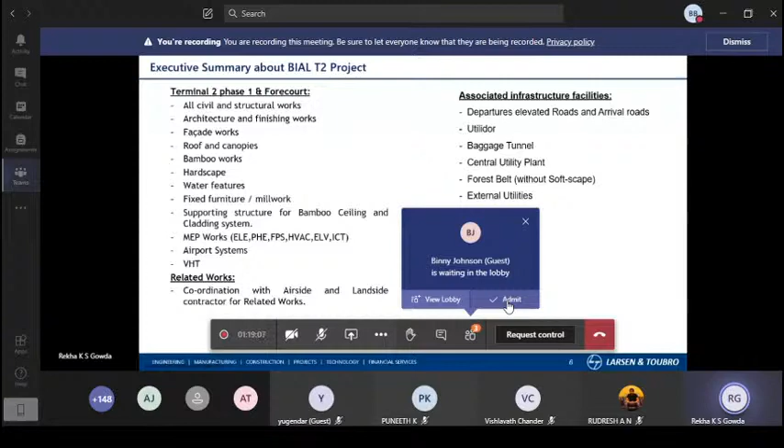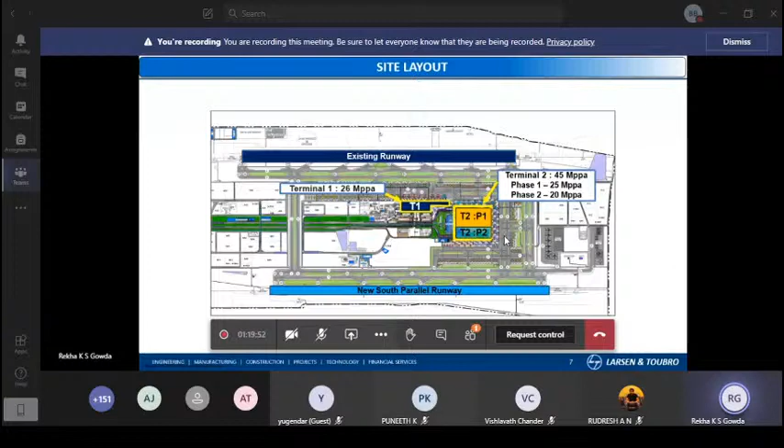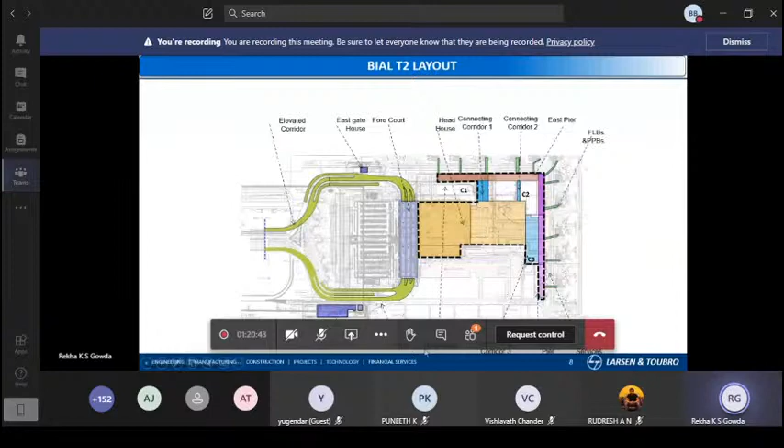And, as I said, there are some other infrastructures like ancillary buildings like the CUP building, Utilidor, and then in between forest belts are there, and then connecting corridors. This is the brief executive summary about BIAL T2. And then coming to the life cycle of the project.

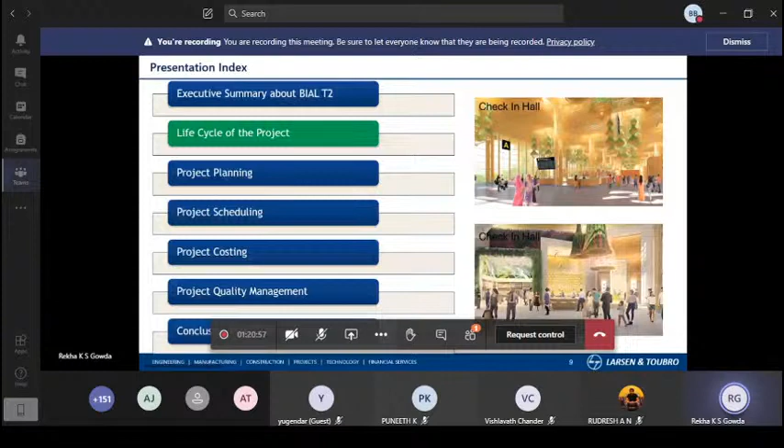The life cycle of the project: generally a project has a start and end date, and there is a sequence of phases involved from the start to the end handing over of the project. The number and sequence of cycles are determined by the management and various other factors like needs of the organization involved in the project, the nature of the project, and its area of application.

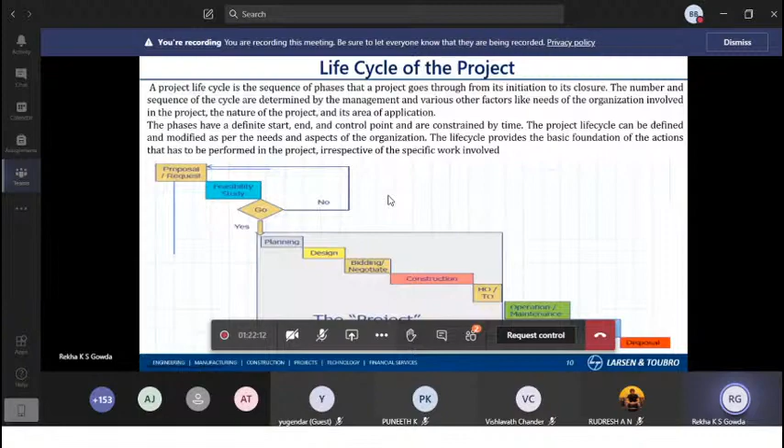Even before starting the project, we will be having some strategic planning, and even after starting the project, we will have execution planning. So here, planning is like the backbone of any project, and of course, execution also has a major place. But to execute the work, we need strategic planning. That is the reason planning plays a major role in any project.

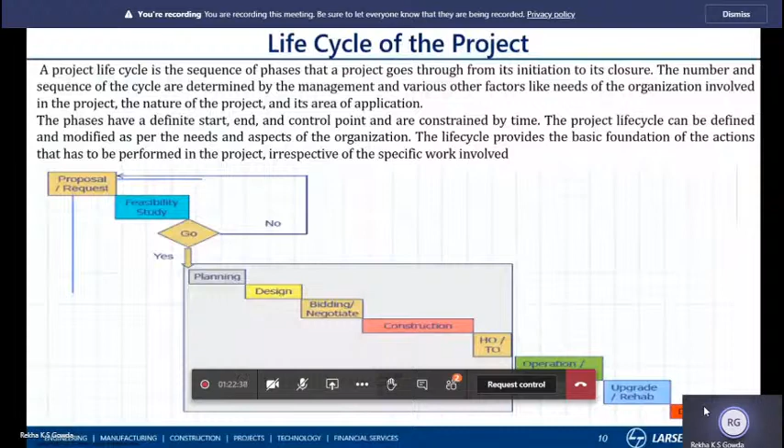And of course, in our engineering, we may study more about technical things like survey, estimation, transportation. But when we come to the construction industry, and to planning, it mainly focuses on management fundamentals. As I said, it mainly focuses on planning, scheduling, costing.

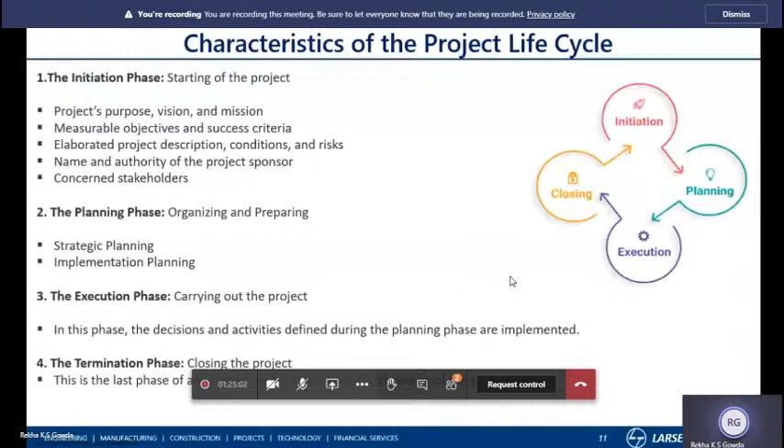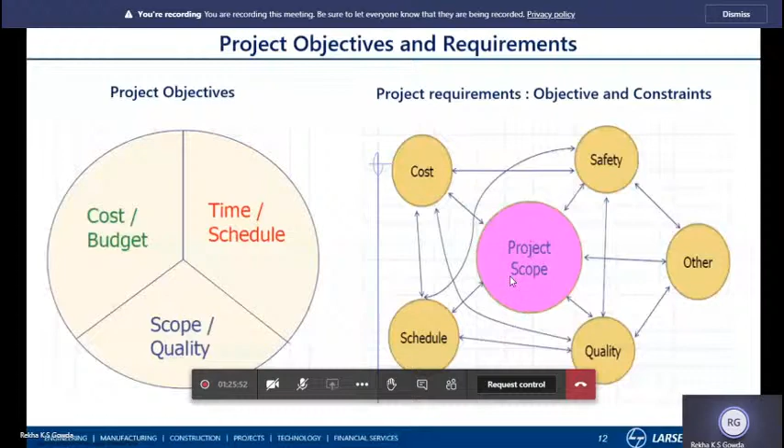And coming to the project planning. Project planning as defined is the determination of the project objectives, as I explained in the previous one, with identification of activities to be performed, methods and resources to be used for accomplishing the task, assignment of responsibility, accountability, and establishment of integrated plan to achieve completion as required.

So planning's role here is to achieve the project objectives, like to complete the project within the time, within the scope, and within the budget. These are the first primary objectives of planning, and these things can be achieved by identifying the activities which are to be performed for the project, what are all the methods which are going to be implemented, and what kind of resources are going to be used for this project. So these are the things which are mainly linked to the planning, strategic planning things, and the action which we take to perform these things, which mainly depends on your scope of the project.

And then importance of planning. Importance of planning means measure twice and cut once. There may be R&D. We will try option one, option two, option three, which is feasible. That will be identified and finalized. That is one thing, we measure twice and cut once, which is the best in terms of cost, time, and quality. That will be picked and executed. And planning and execution, there is an inverse relationship between planning and execution.

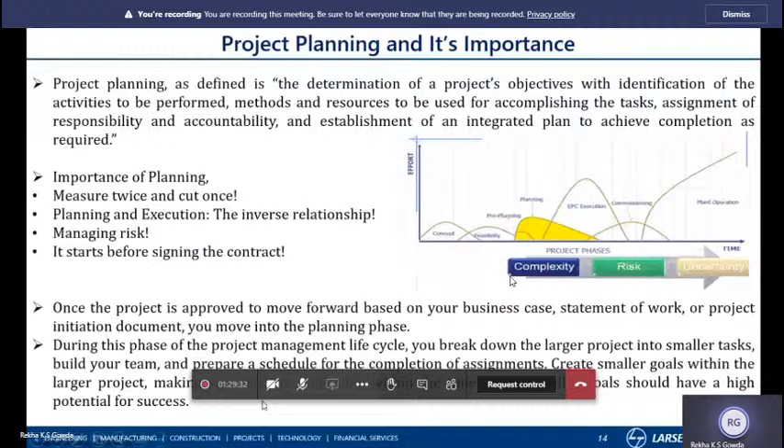Sure, and next coming to creating a project plan. Identify the project timeline, including the phases of the project, the tasks to be performed, and possible constraints. This is nothing but the scheduling portion. When we start the project, first we will identify the duration of the project. As I said, this BIAL T2 is a 30-month project.

So for a 30-month project, we will break down those 30 months, like how many months we need to complete civil, then MEP, then finishes, then airport systems. That breakdown we will do first, and then tasks to be performed. So which task is to be performed when needs to be identified, and possible constraints.

A possible constraint, for example, is any approval. All these constraints we will identify before the start of the project. These are all part and parcel of the project plan. And then coming to the workflow diagram: creating a workflow diagram, visualize the process using a work breakdown structure to make sure team members clearly understand their role in a project.

And then estimating budget and creating a financial plan. This estimating budget and financial plan is one of the important ones in any project, because as a contractor we majorly work on the cost, and it determines our total gross margin on any project. So estimating the budget plays a very important role in any project.

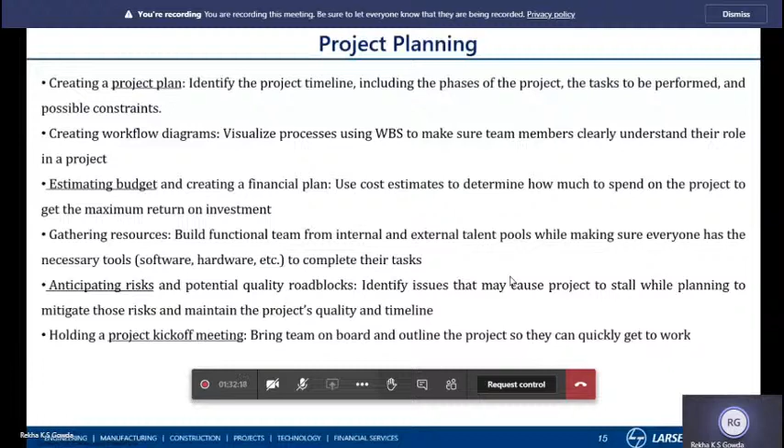And the planning phase consists of this work breakdown structure. Work breakdown structure: work is a physical or mental effort to achieve an objective or result or deliverables; breakdown is to divide into deliverable components; and structure is something arranged in a definite pattern of organization.

So WBS is defined as a deliverable-oriented hierarchical decomposition of work to be executed by the project team to accomplish the project objectives and create required deliverables. It organizes and defines the total scope of the project. As you see in this work breakdown structure, the project goal comes under level 1, and then the objectives of the milestone.

Here a milestone is nothing but a subgroup of the project goals. For example, completing the civil structure works may be one milestone, and completing the MEP service works is another milestone. These put together help to achieve our project goals, and these milestones will again be subdivided into deliverables. These deliverables will have each task and resource, and then will be divided into work packages.

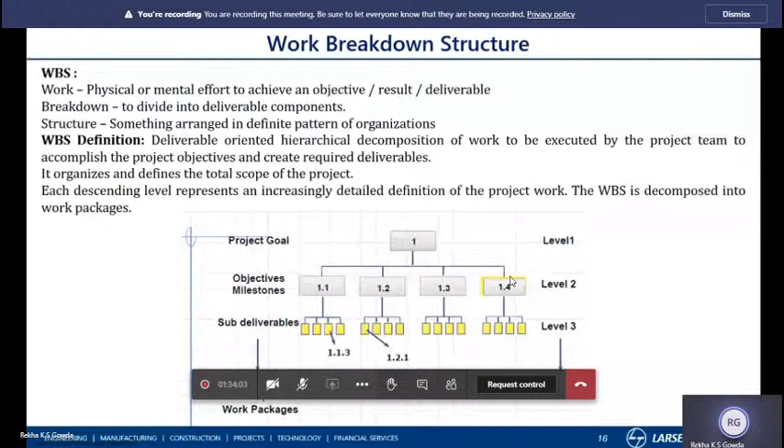And these are all hierarchical breakdowns. The first level defines the project, the second level defines major and supporting deliverables, and level 3 defines the lowest management responsibility level. Here our management responsibility lies with level 1 and level 2. Level 3 is completely under execution.

And then a work breakdown structure subdeliverable includes the outcome of more than one work package from perhaps 2 or 3 departments. Therefore, subdeliverables do not have a duration of their own. Subdeliverables do not consume resources or cost money directly. The intersection of work packages and organizational units creates a project control point, and this cost account integrates work and responsibilities. And this is how the WBS works in any project.

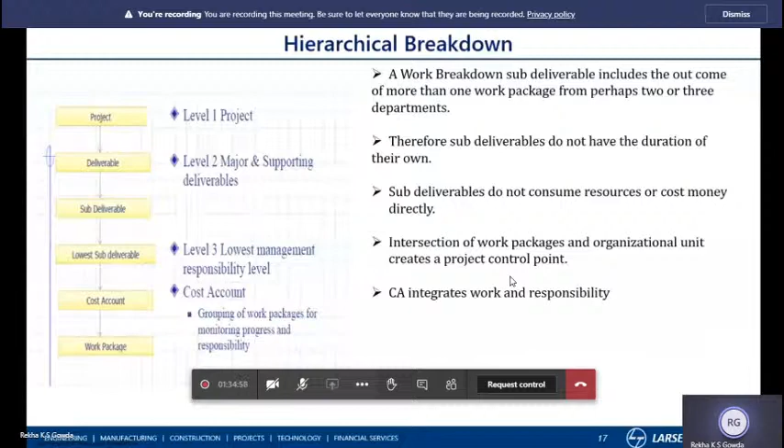Generally, MSP, Microsoft Project, will be used for scheduling. Since some projects have specific conditions, we have to use Primavera. Okay? So in the airport project we are using Primavera 6 for scheduling, and WBS will be defined in this way. First is acceptance criteria, then scope baseline, then work breakdown dictionary, then project scope,

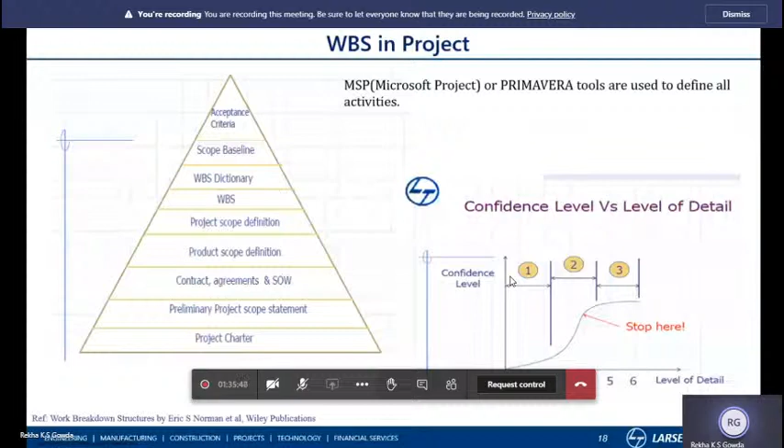then contract agreement, then preliminary project scope statement, and then project charter. The project charter defines all the activities which need to be executed. So those are the things which come under project planning. And then coming to project scheduling.

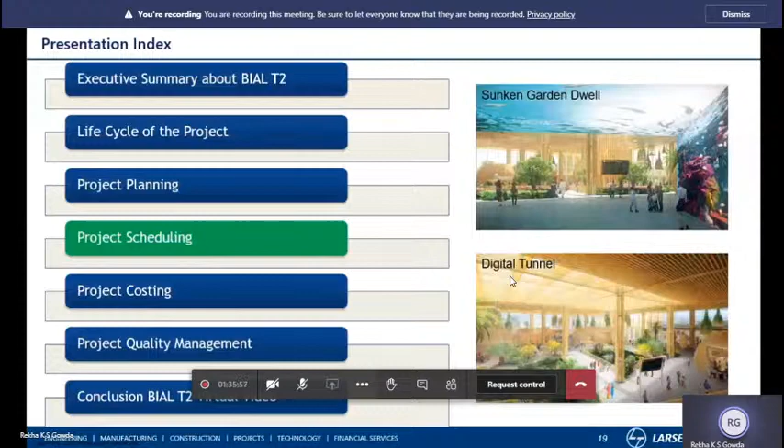I guess you guys might have gone through all these things. In general project scheduling, we use Primavera, and the Gantt chart will generally be used in MSP as well as in Primavera 6.

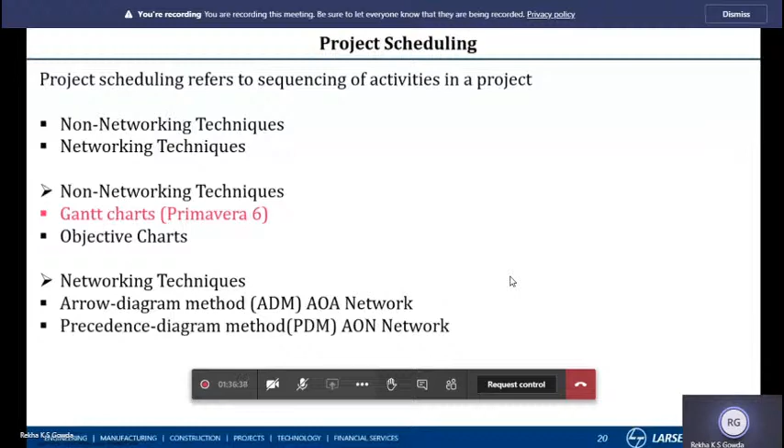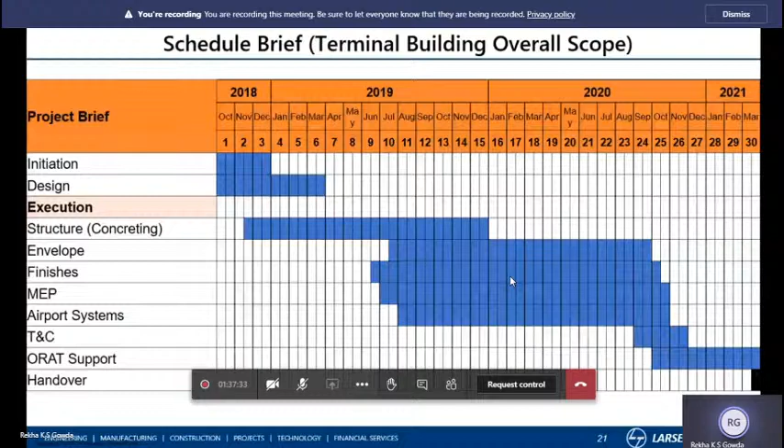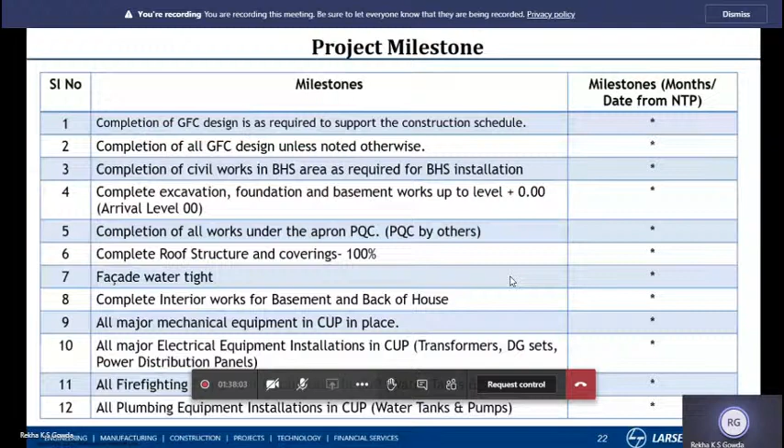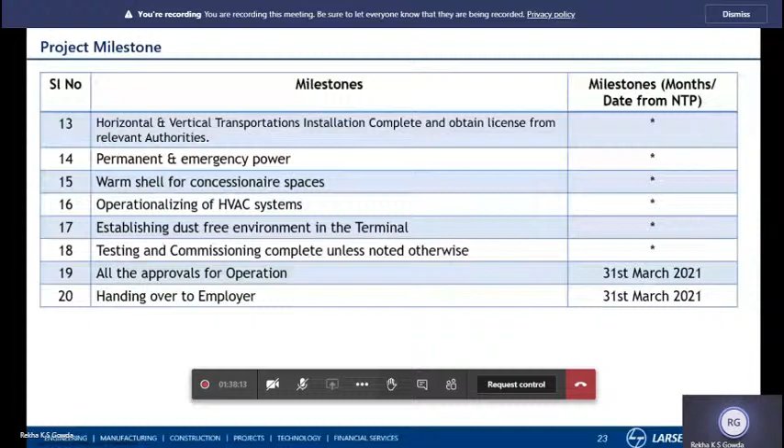And then coming to the project costing. Project costing is nothing but the total expenses of the project which we are going to incur. And before going to this project costing, I just want to brief about this cost. First thing, cost refers the amount of expenses spent to generate product or any services like construction. Cost refers expenditure that may be actual or nominal expense incurred to generate output. Cost is the value of economic resource used as result of producing or doing things.

Cost has many meanings, but in management, cost refers the expenditure, not the price. Expenditure means that includes the price of the goods, whatever. The cost which we are going to incur to get the final product is called as the expenditure. As a project professional, we use cost information for taking decisions or making plans, programs, policies and strategies. Then coming to the cost engineering. Cost engineering

Is it audible to everyone? Am I audible to everyone? Yeah, yes, ma'am, you are audible. You can continue. Okay. Yes, ma'am. Okay.

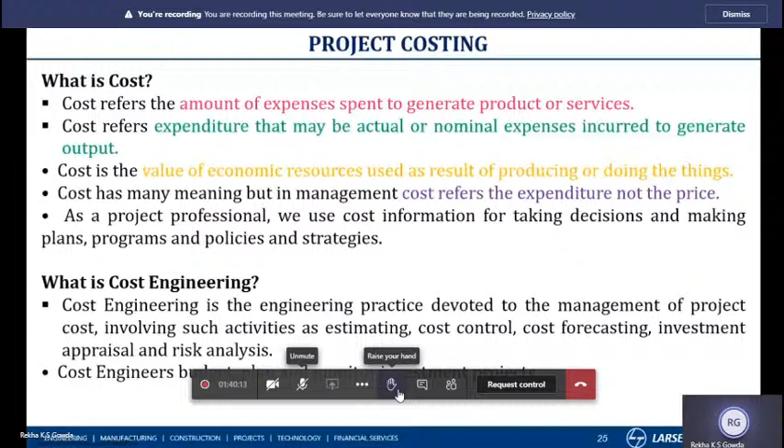And when it comes to the costing, there are three elements in the costing: material, labor, and expenses. Material cost includes direct as well as indirect. Material is not only the physical part of an asset, but also includes failure costs like scraps, construction formworks, safety items, and logistic costs to transport the material to the workplace. So in this material, there are two divisions: direct material cost and indirect cost.

Direct material cost means directly which is going inside the construction activities. That is called the direct material cost. And indirect means it is just like a supporting activity. That may be transportation. Example, to get that material, we need transport. For shifting of this material, we need the transportation. So that is the indirect expenditure which we are going to incur.

And then coming to labor cost. Cost incurred for the entire project team from laborer to foreman to project engineer to project management. Here also, labors generally means those who are going to do the work at the construction site. They will come under the direct labor cost. And indirect means, for example, foreman, project engineers, project manager; they are all supporting, like a service kind of thing. Those costs will come as an indirect labor cost.

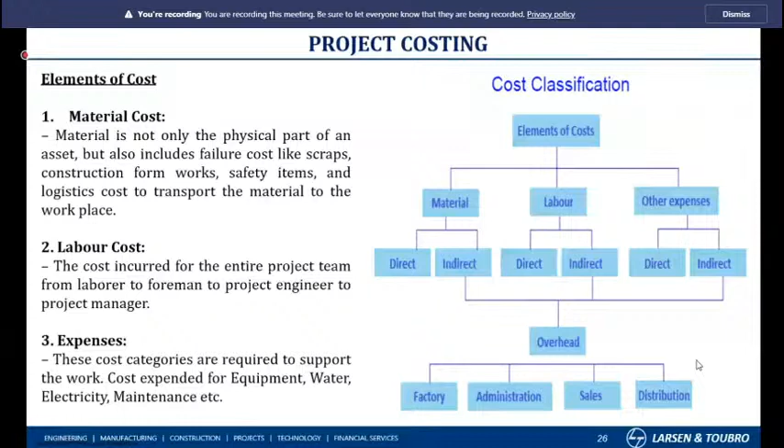And then coming to the cost structuring. Cost structuring will help to get a clear picture of how the cost is expended on the project, like to understand whether it is direct cost or indirect cost. This cost structure says that, suppose material portion, if concrete we are using. Concrete material, yes, that is a direct cost material, but whether 100% of it is used as a direct cost, or there are some portions like shifting, lifting, all those things which come as an indirect cost. So this identification will be defined by the cost structuring.

So cost structuring helps in assorting cost elements into direct cost, indirect cost, fixed cost, and variable cost. Cost structuring has a total of four types: direct, indirect, fixed cost and variable costs. This will help management to do effective estimation, budgeting, and cost controls. Coming to the direct cost, it is the cost of the resource which is used exclusively for the purpose of completing the activities or assets for any given project, and it cannot be shared among other projects.

Hence, direct cost is any cost specifically identified with a particular final cost objective, but not necessarily limited to items that are incorporated in the end product as material, equipment, or labor. For example, for BIAL T2 construction project, foundation of PTB, which is nothing but passenger terminal building, includes trenching. Trenching is nothing but MEP services which are used in the basement while doing this footing. So this includes formwork, solid blocks and concrete, and the laborer to place and finish the concrete work.

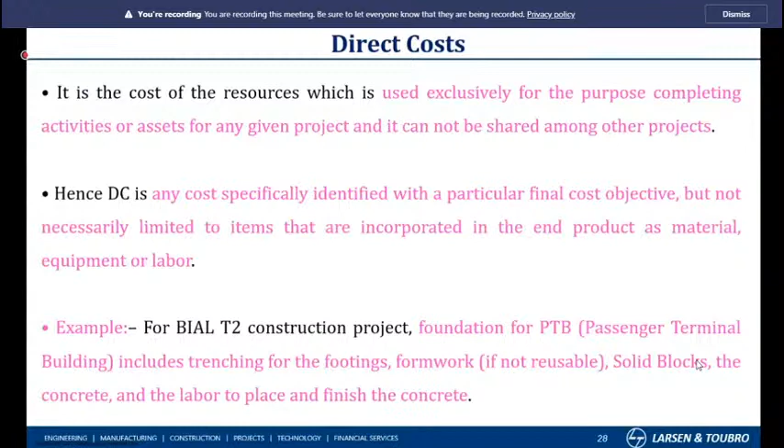And coming to the indirect cost, it is the cost of resources which is used to support completion of activities or assets for any given project, and also associated with other activities and assets. This indirect cost allocated to an activity or asset is based upon the direct cost elements such as labor hours, materials, equipment costs, all three. It is also referred to as overhead cost or burden cost.

Indirect cost is nothing but the service cost. Say, for example, in any project you take staff, department staff and welfare cost, PF and temporary structure cost. These are all service costs which indirectly help to achieve the construction activities. It's called indirect cost.

And then coming to the fixed cost, it is also called period cost or capacity cost. Fixed costs are those cost elements that must be provided independent of the volume of work activity or asset production that they support. It doesn't change in the short term period or within a relevant range. For example, project setup cost, infrastructure creation cost, fixed salary, office rent. These are all the fixed costs.

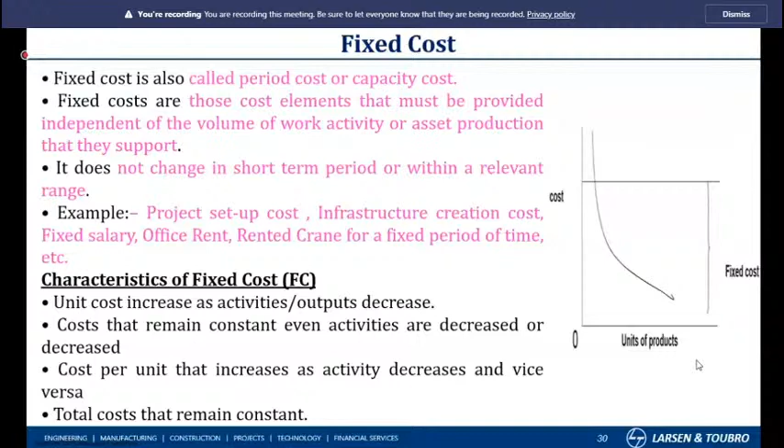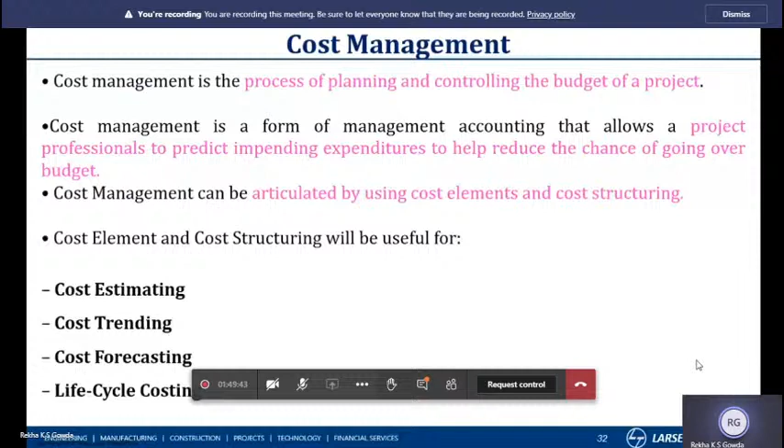Then coming to the cost estimation, this tool is used to predict the quantity, cost and price of the resources required by the scope of a project. I guess in engineering we all might have studied this cost estimation: estimation in terms of quantity, and then in terms of cost, in terms of price. Cost estimation is needed to provide decision makers with the means to make investment decisions, choose between alternatives, and to set up the budget during the front end of the project.

And then prerequisites for proper cost estimation are scope clarity, cost element structure, and historical database. This historical database means the previous experience. Suppose in the previous project, the same experience which we may use while analyzing this project. So previous historical data plays an important role while doing this cost estimation.

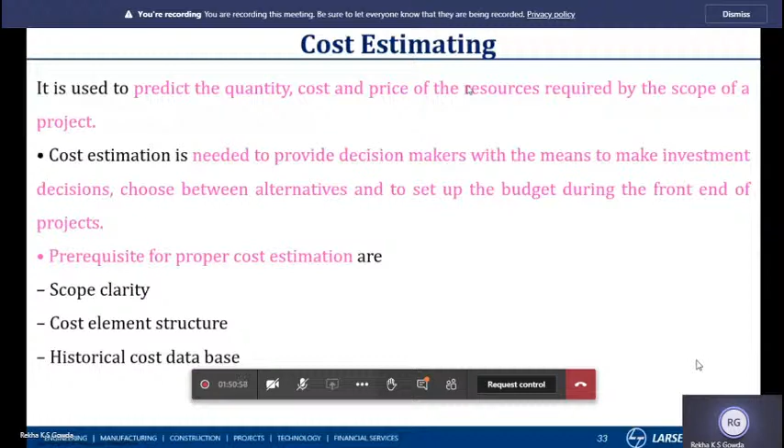And then cost trending. Cost trending is useful where the historical data is used as a basis to estimate the resource cost, used to predict future spending trends or to complete the project activities. It refers to historical information to find information like, just as an example, how much did we spend for welding of pipes for the past 6 months and how many inch diameter of pipe being welded. This is just like previous historical data and how much we are going to incur that cost. This is nothing but cost trending.

And what is our monthly site expenses cost for the last 1 year? So this will help us to estimate the future expenditure of the project.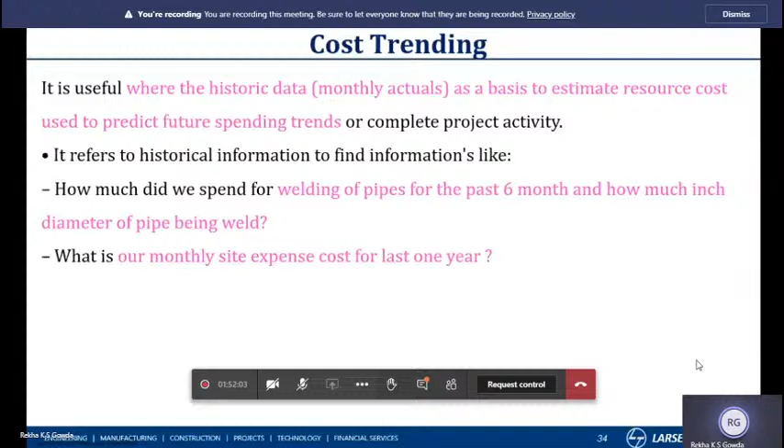And then coming to the cost forecasting, it is nothing but determining required expenditures at the various payment stages of a project. Estimation emphasizes estimating future project activities and assets, but in forecasting, the future cost expenditure will be predicted based on the historical cost performance. So this forecasting phase will come once the project starts, in the middle of the project.

Suppose the project is completed at 50% and the balance 50% is there. That balance 50% we will estimate and forecast, whether this 50% will be completed within our budget or whether we are going to incur more than that. This estimate to complete will be forecasted, as I said, based on the previous historical data.

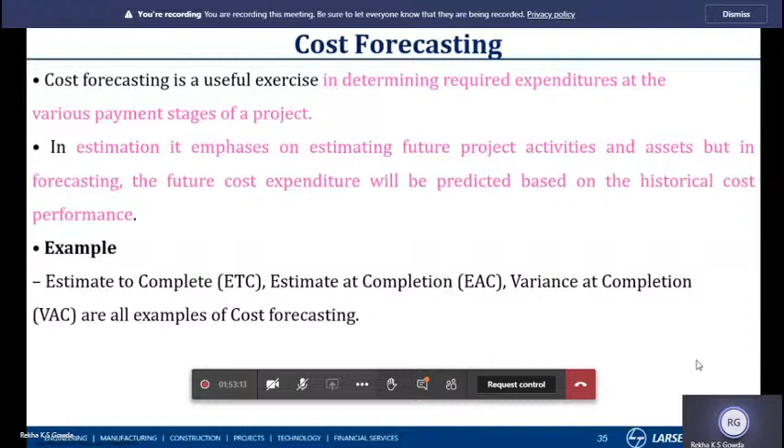And then coming to life cycle costing. Life cycle costing means the cost of creation of project assets and maintaining assets throughout their life cycle, including the disposal cost. Generally, this phase of costing will not come in a short duration project. This is anyway at the end of the project only. Life cycle costing enables decisions on acquisition, maintenance and refurbishment or disposal to be made in the light of full cost implication. So this life cycle costing will include design, construction, operation and maintenance, and disposal.

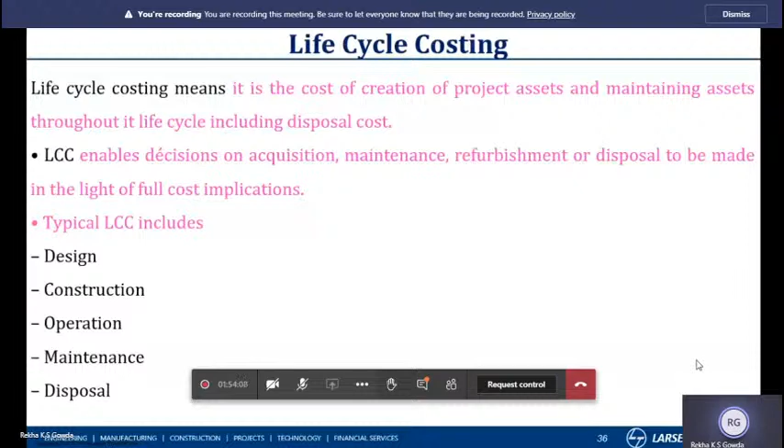And coming to the project quality management system, it is applicable all over this. It starts from the design quality plan. It defines the sequence of design development, design approval process flow, control of design and development changes, and documentation management. The quality management plan addresses requirements of ISO 9001:2015, extent of control over subcontractors or vendors, identification and disposition of non-conformities, internal audit process, and inspection process.

And then the construction quality plan elaborates work procedures of critical activities, inspection and test plan, quality control points and test frequency, and responsibility. Responsibility is nothing but the organization chart, like who is going to do what. So this responsibility will be defined in the quality management system.

And material handling: once we receive all materials, be it for the construction or MEP work, the handling procedure, everything will be defined in the quality management system, and inspection reports as per the QMS. And the interface management plan elaborates interface management, which is nothing but the interface between civil, MEP and finishes, and areas of interface issue resolution, flow and interface meetings, forms and formats.

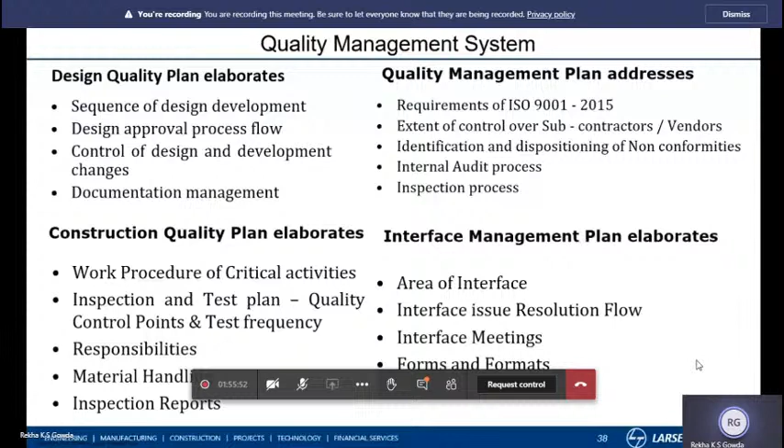And the quality process starts from the quality policy, and then the quality policy describes the quality objectives that involve the project quality plan. This is based on the customer requirement or the specification as well as the preventive measures and continual improvement.

And this PQP will be used for the resource mobilization, and it starts from identification of requirement and training, and then coming to the execution or commissioning. This PQP will be used for material or method statement approval, and then three-tier material inspection and stage-wise activity inspection, and then internal audit and management information system.

So these are all part of this project quality plan that will be used for these quality objectives. And then finally, coming to the management review and corrective action. Once after completing all this process, then it will go to the customer satisfaction or customer feedback process. Suppose if any changes, again they will start from the quality objectives and PQP.

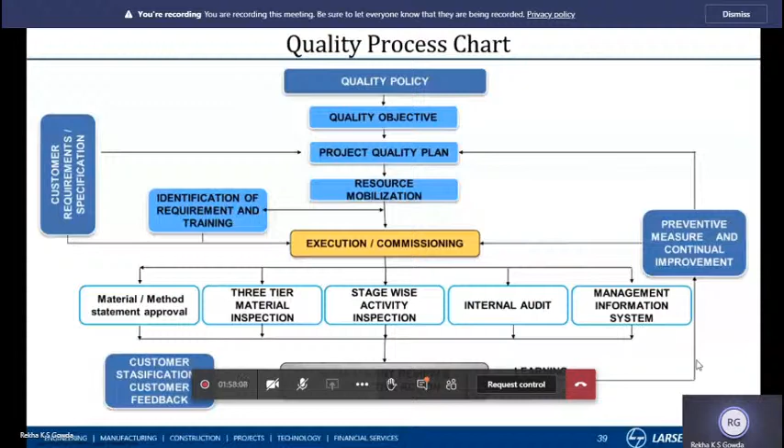And these are all the small samples of the quality app which we are presently using at the BIAL T2 project. This quality app will be used for creating the checklist for any work activities, and any non-conformity report, suppose any work they have done half the way and not completed. So this is the app which we use to raise this concern to the particular engineer with all these observations.

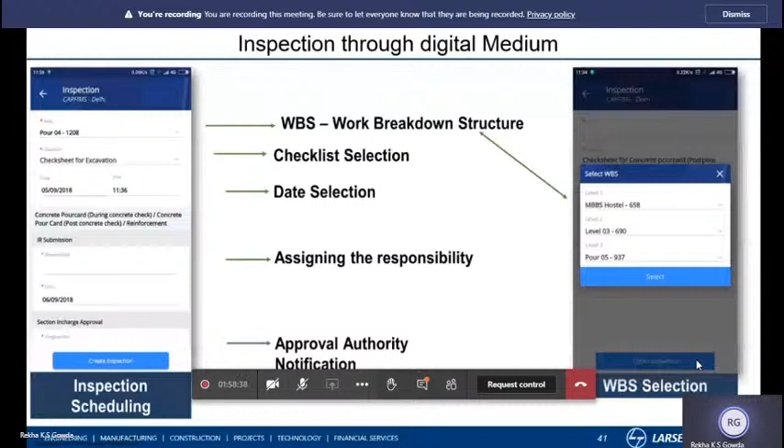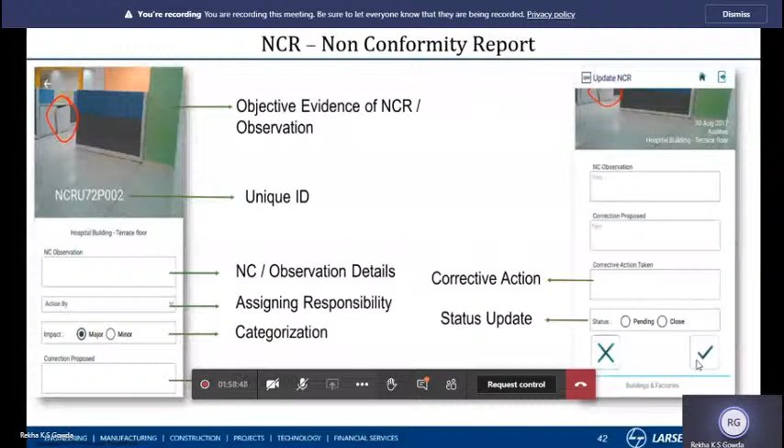And coming to that, I would like to play one video about our BIAL T2 project. It is just a virtual video. It is not the completed one. Let me play this.

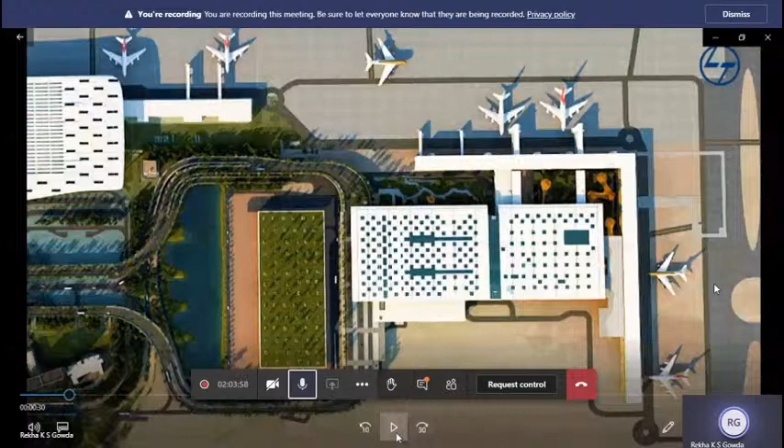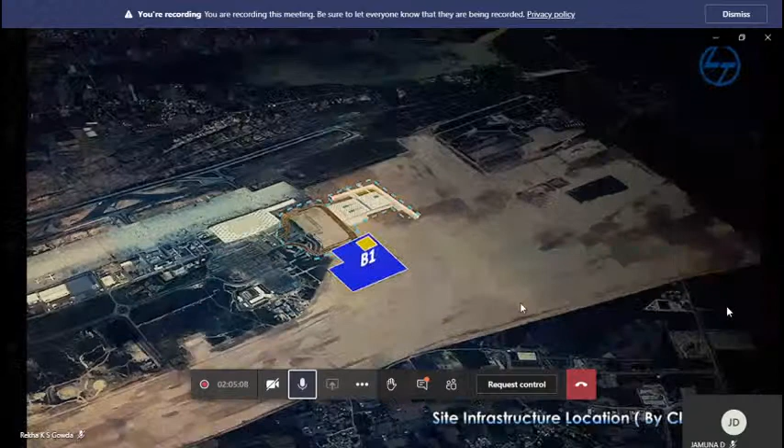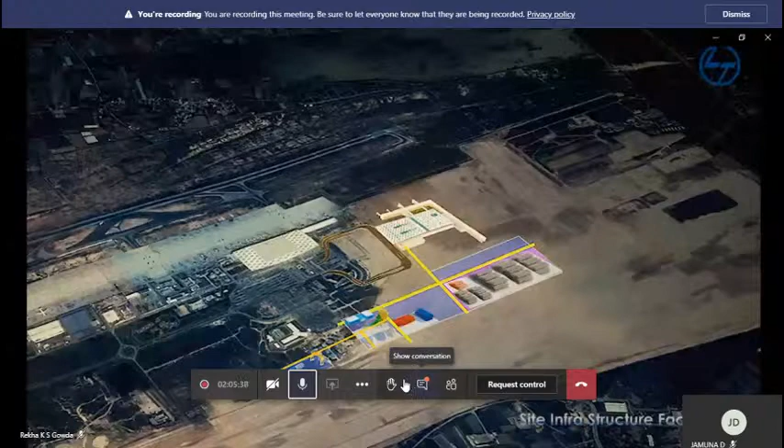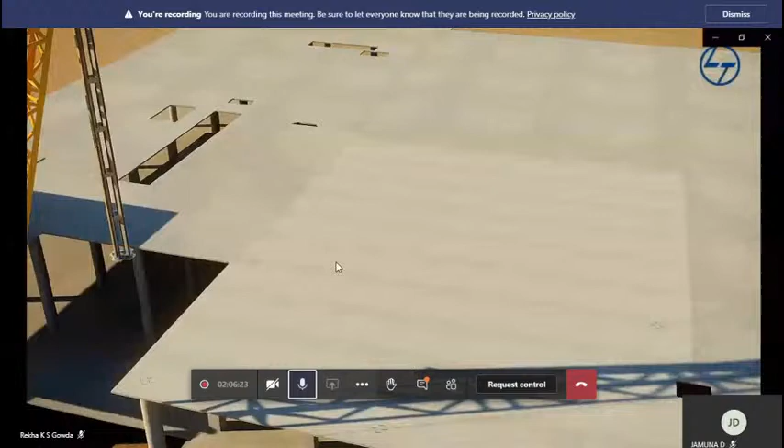Can you please send? Yes, madam, the video is visible. Restart it, ma'am, please. I can see the video, ma'am, but I can't listen to the audio. Hello. Hello. Ma'am, you can play it again.

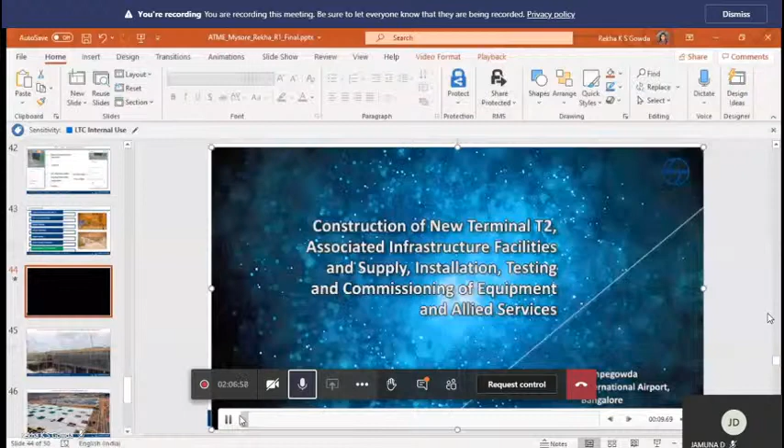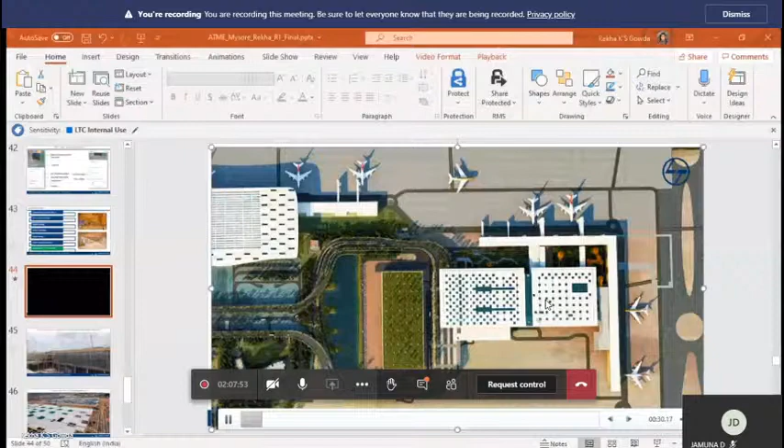Is it visible now? The first page, Kempegowda International Airport, Bangalore, is visible. Is it audible now? No, ma'am, you can just explain what it is. We can see the photos of Terminal 2. Okay, that's fine. This is the total terminal, and what you are seeing is the terminal phase.

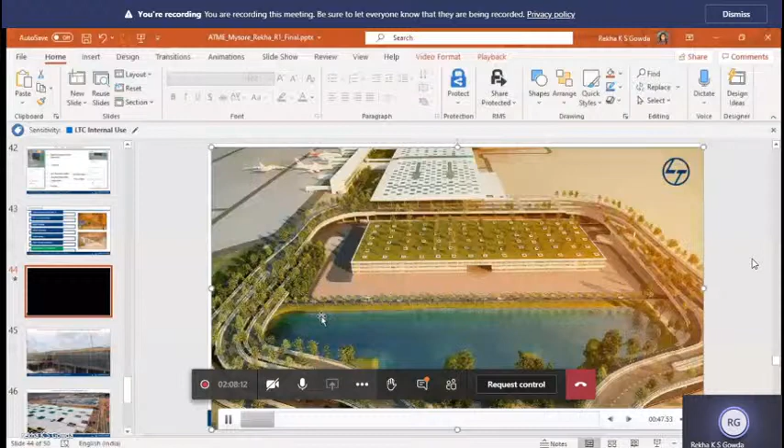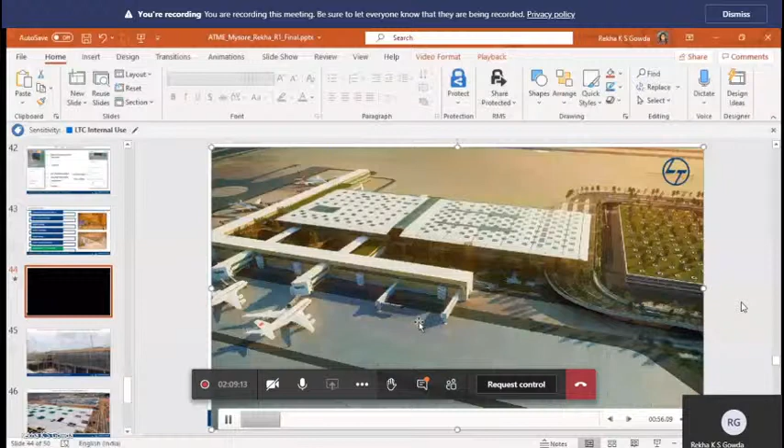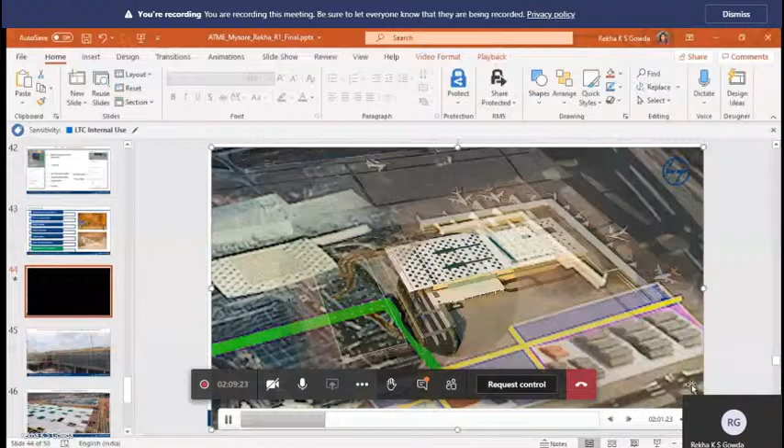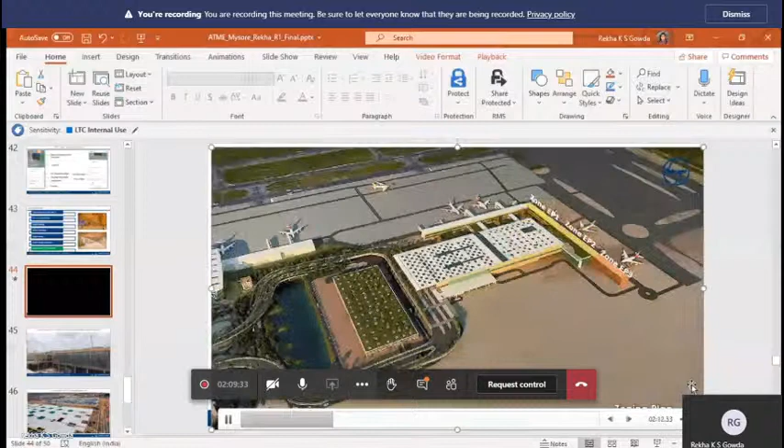And these are the templates, for all material calculation.

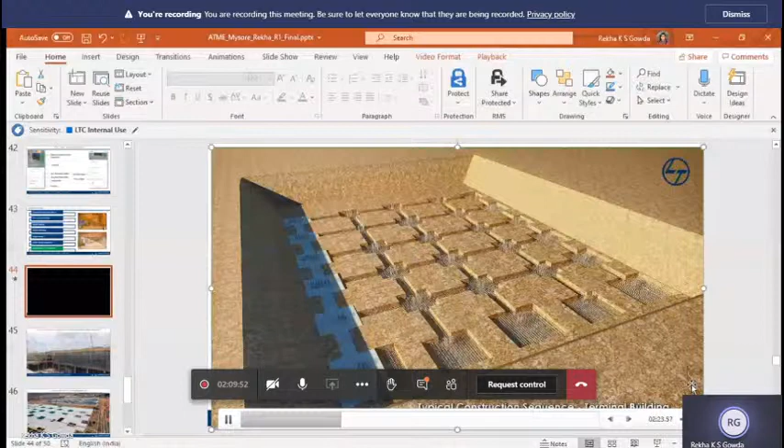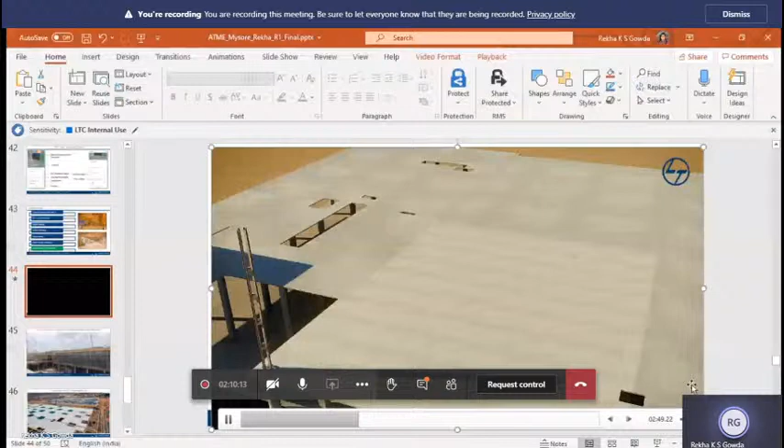Ma'am, please increase the volume of the audio. Can you please increase the volume? Okay, fine. That is the maximum volume.

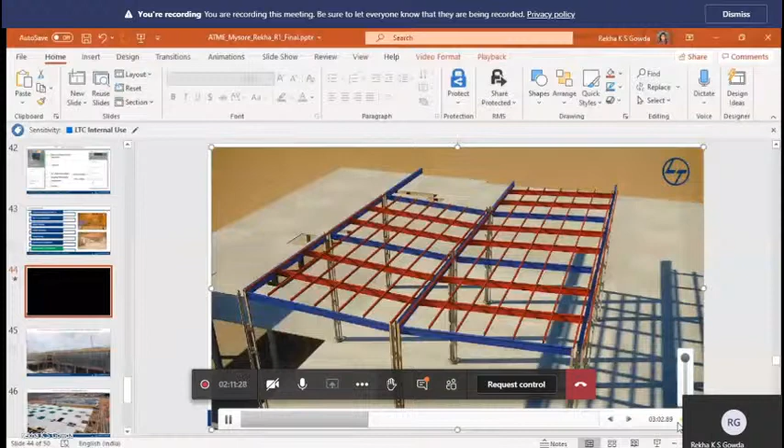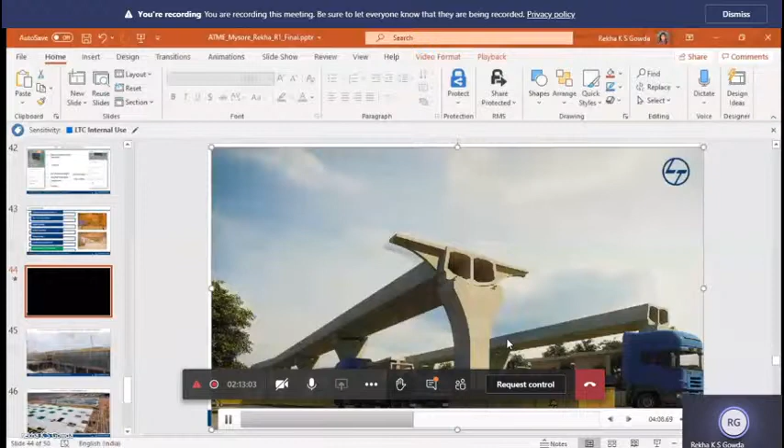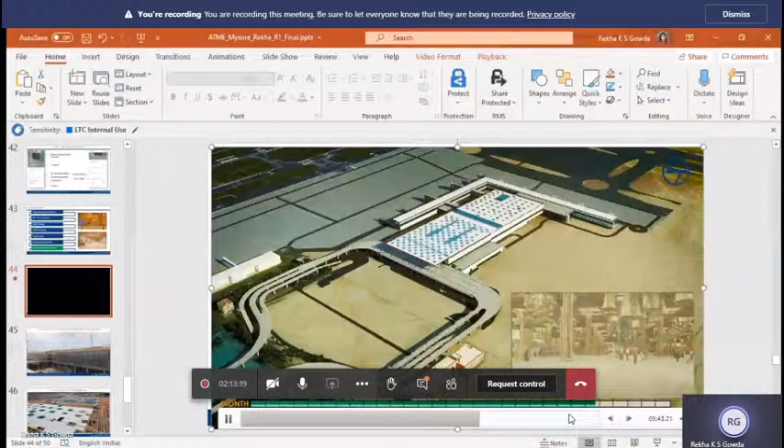Elevated corridor. Terminal building. Yes, ma'am, it is visible.

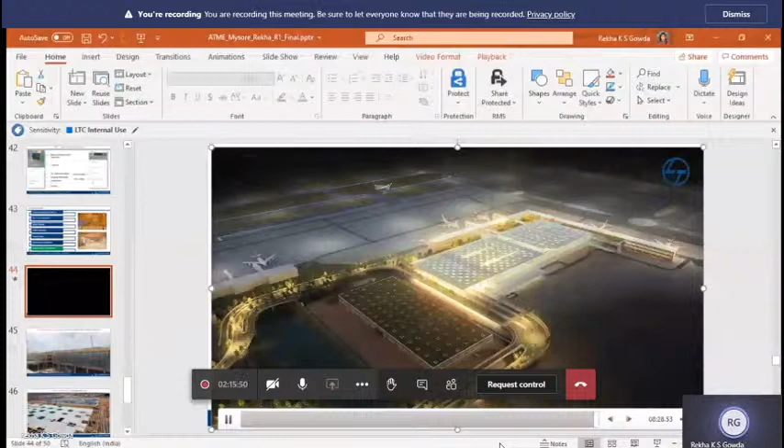Sorry guys, due to some technical problems I couldn't play the audio. It's okay, ma'am.